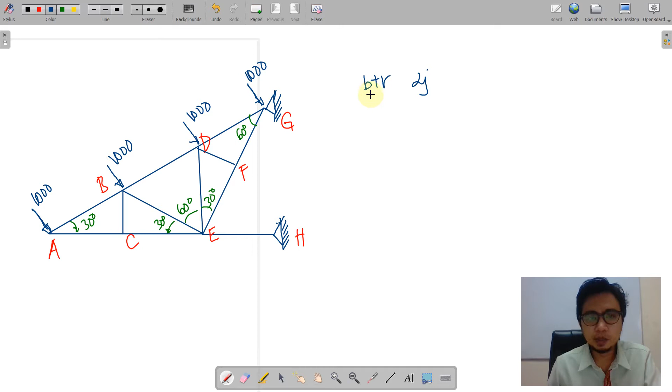Of course, you want to check its stability and determinacy by our truss criterion. We have this criterion, b plus r to be compared with 2j. Our number of bars, if we count it, is 12, and the reaction is obviously 4. As for the joints, we have 8 joints, so this will fall under a statically determinate structure. So let us now place RH horizontal here, and obviously there will be no vertical for H.

That is 0 because we have here a single member, and a single member is countered by a force aligned along its axis. If that is the case, this is a horizontal member, so this should be a horizontal force to counter our force here. For G, we're going to label that as RGY and RGX.

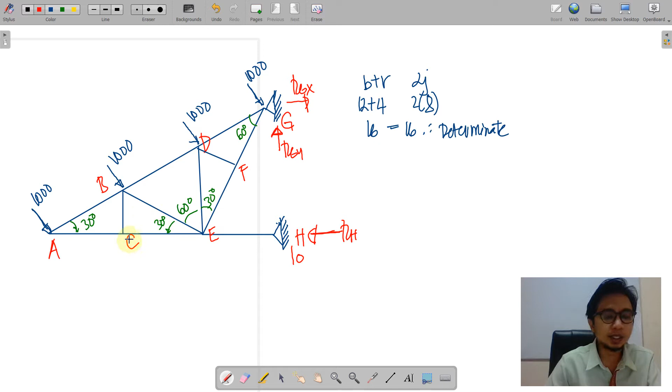Before we start with our analysis, perhaps we can observe our truss, wherein we look at the joints where there are no forces. If we take a look at the truss, we have joints C, E, and F without any loading. If that is the case, we can apply the principle of rotated axis along those joints and conclude some zero members. So, determine some zero members.

If we rotate considering C here, creating an axis on that C, we have the X and Y axis, the usual axis, and we have no load on this portion. Therefore, along the vertical, there will be no vertical resistance on this joint C. So we can say that BC is a zero force member. Similarly on F, creating a rotated axis, say this is X and this is Y, EF and FG are parallel to each other, so they will just counter each other along this rotated x-axis. However, there is no force along the rotated Y here, so we can say that DF is as well a zero force member.

So moving on, of course, we are to work with A, because A has only two force members to work with, that is AC and AB. So applying now our rule, we'll go over joint by joint analysis, because this time the loading is oriented perpendicular to a certain member, so this inclined member, say A to G.

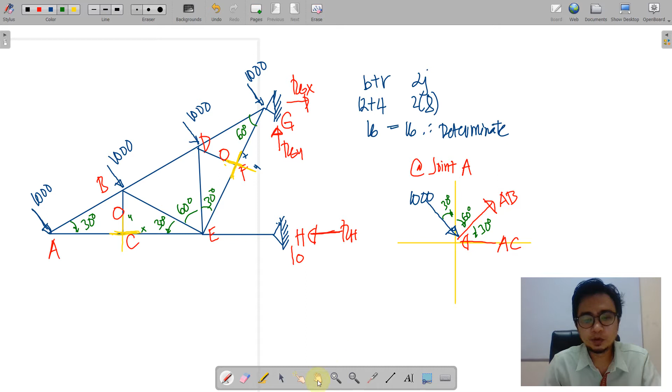It is obvious here that AC has nothing to do with the vertical, so AB is the only force along the vertical line. Therefore, by summation of forces vertical equal to 0, with upward denoted as positive, we have AB sine of 30 less 1000 cosine 30, and these are all equal to 0. So AB is found to be 1732.05.

We can get the other force by summation of forces X equal to 0. We have leftwards AC plus rightwards 1000 sine of 30 plus rightwards AB using the angle 30, that is cosine 30. Those are all equal to 0. Therefore AC, substituting the value of AB, we have 2000.

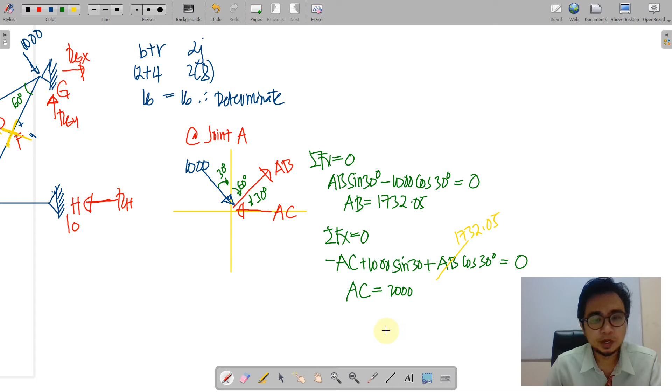Let us note here that all of our answers are positive values, meaning we have correctly assumed the direction for AC and AB. Placing this into our truss diagram, we have 1732.05, that is tensile as assumed here, and a compression of 2000 as assumed also here. So all of our assumptions are correct, so we will place it correctly here. If we have a negative sign, we will just maintain the direction and carry the sign on your truss diagram.

So if we proceed to joint C, of course, there is no force on the vertical side of C. Then we have a compressive force of 2000 on C. Therefore, it will be countered by no other than CE, and that is also equal to 2000 here. Moving on, at joint B, we will draw the x and y axis.

So I'm gonna place here what we have obtained on AB, that is 1732.05, and assume the parallel force, which is BD, and both are inclined at 30-degree angle on the horizontal line. We then again place the 1000 here. 1000 here is again perpendicular to this diagonal member, so that this is 60 degrees and that is also 30 degrees. And then we have here BE inclined at 30-degree angle with the horizontal also. So BC here is equivalent to 0, so we do not have to place it in our free body diagram.

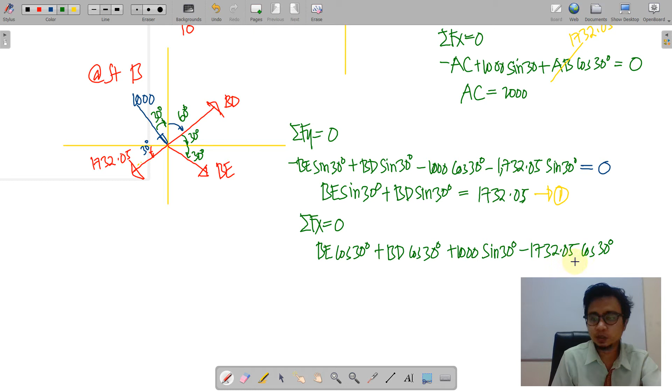The other equation will be supplemented by summation forces x is equal to 0. So we perform this equation according to the arrangement of this equation. We start with BE. BE is rightward, as well as BD, that is also rightwards, plus a rightwards 1000 sine 30, less a leftwards 1732.05 cosine of 30, and all of this will be equal to 0. Again, we organize the equation. We just have to transpose the constant to the right side, and this will be our second equation.

Working with the two equations, we have two equations with two unknowns. We have negative 1154.7 for BE and BD equal to 2309.4. So here we have a wrong assumption because we have an indicated negative sign in our result. So therefore, BE is initially assumed to be tensile. Therefore, with the negative sign here, we'll just have to correct it that this should be equal to positive 1154.7. This is in compression. And then BD yielded a positive answer. So therefore, our assumption that this is tensile is correct. So we'll just have to place here a tensile force.

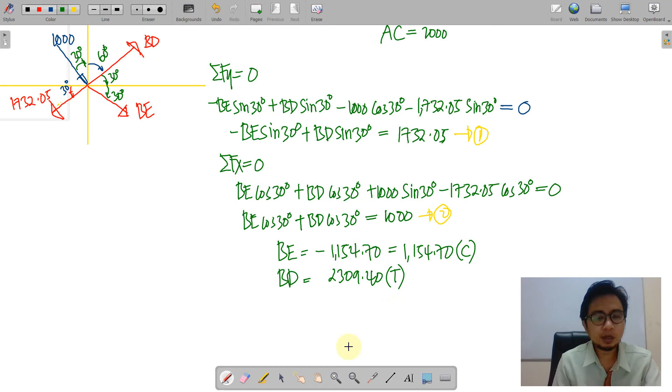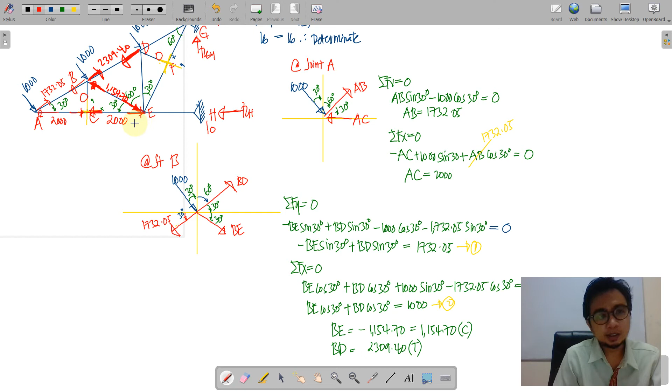But in our truss diagram, we do not have to replace the arrow. Okay, just place what you have assumed, then carry the sign and place your BE as it is. That is in tension. However, it is negative 1154.7. So again, I did not replace or change my assumption for that BE. So it is assumed as a tensile, but I'll just carry the negative sign for that.

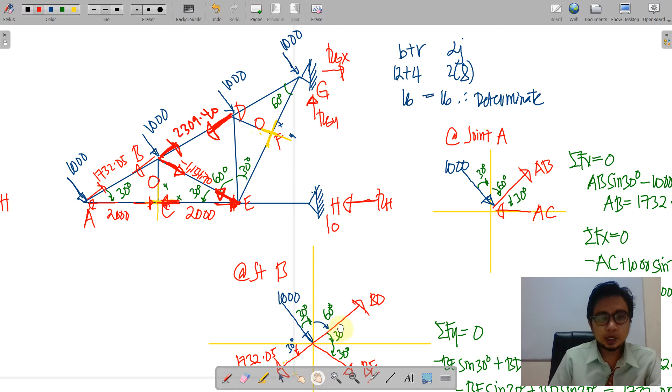So moving on with the solution, of course, between D and E, D will be much preferred because at D, there are only two unknowns, namely DG and DE. So we isolate joint D here. We see at joint D, we have the X and Y axis. Illustrate what's in the joint. So we have here 2309.4 inclined with the horizontal line at 30 degrees. Parallel to it is DG assumed as you see. We again use the horizontal line for its reference angle 30 degrees. We reflect the 1000 force perpendicular to these inclined members. So those are the internal angles using this figure.

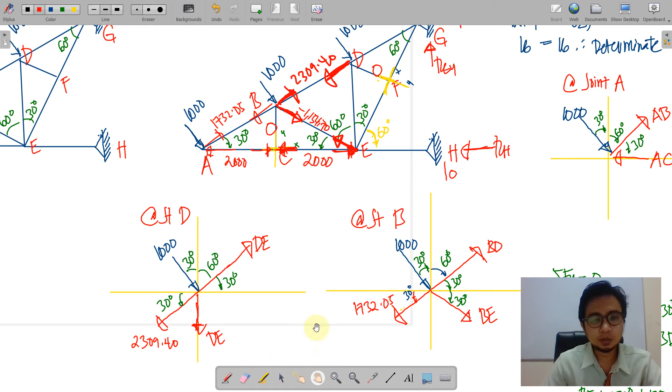Now for member DE. Member DE is just vertical. Why? Because as we can see in the figure, we can conclude that the last angle here is actually 60 degree. Therefore, this is the force assumed at a tensile orientation. So, working with this joint D now, we form summation forces X is equal to 0. DG cosine 30 degrees. We think we have a similar force here, so perhaps you can check that one. So joint D, this is DE. This is DE. This should be DG. Okay, so that this is also DG. Less a leftward force 2309 cosine 30 plus the rightward 1000 sine of 30 degrees. And these are all equal to 0.

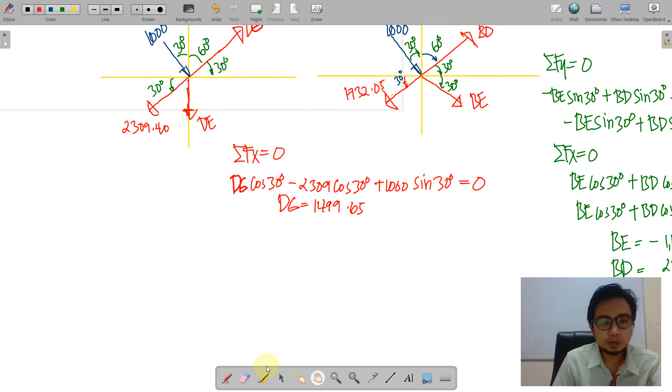So here we have a single unknown, DG to be equal to 1499.65. For the other unknown, we perform summation forces Y so that we have downwards DE, downwards 1000 cosine 30, downwards 2309.4 sine of 30, and an upwards DG sine of 30, that is equal to 0. We substitute the value of DG. So I think we have to check for DG here. We should have 1732.05. Substitute it in here. We have negative 1154.7, which implied a wrong assumption on the direction.

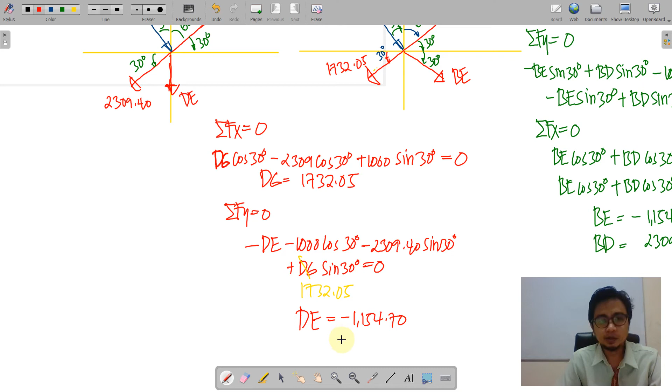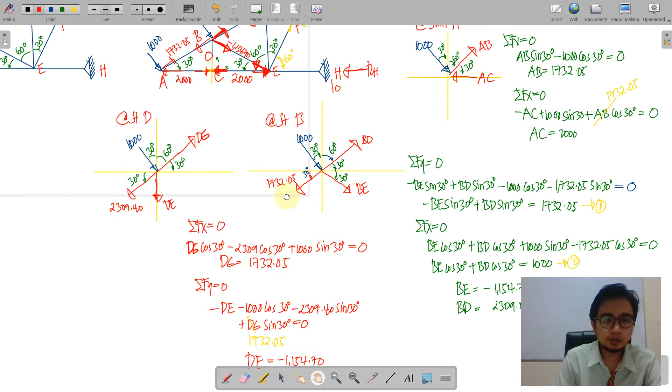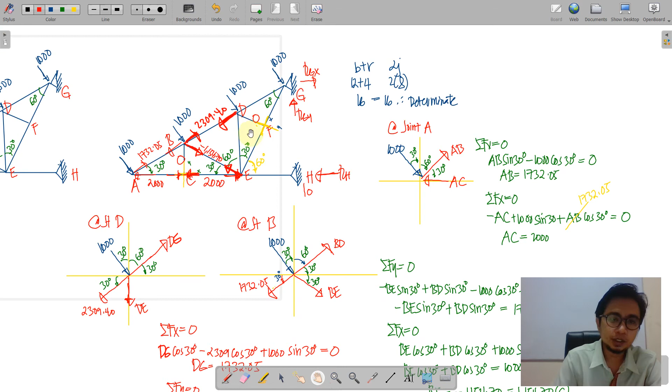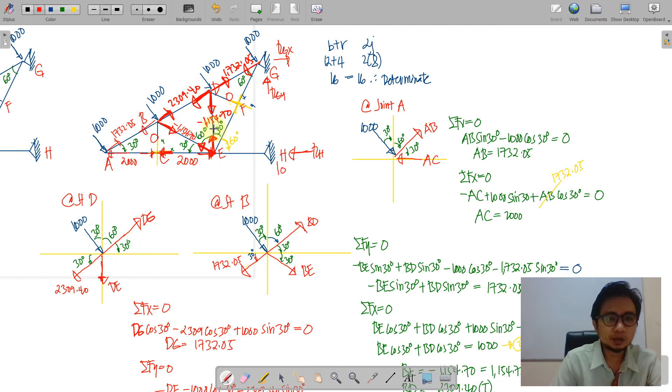So looking on what we have finished, we can place here now the value for DG, and DG was assumed to be tensile. So here is DG, that should be tensile with a value of 1732.05. And as for DE, DE yielded a negative answer, and it is assumed to be tensile also. Therefore, we'll just maintain that tensile, but maintain also the negative sign. So finally, as we can see here, we will now proceed to joint E.

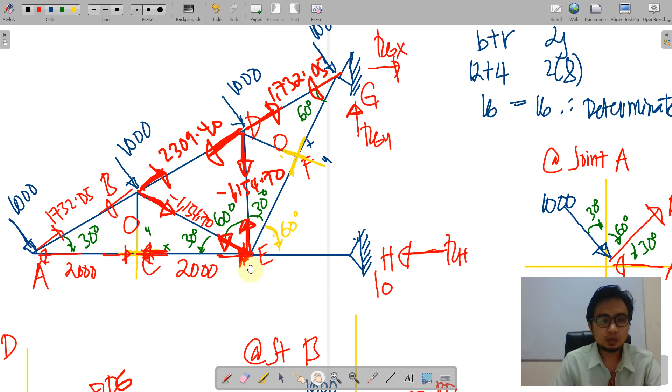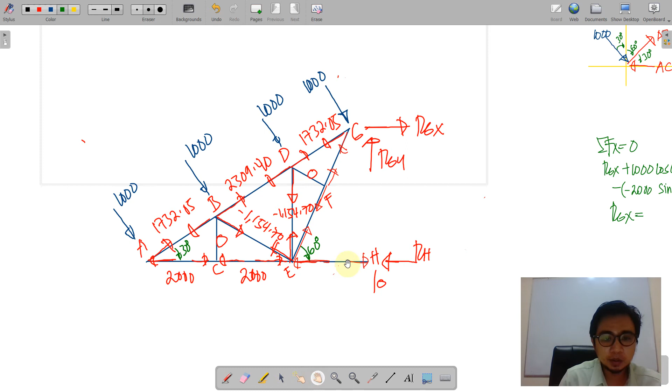So looking at what we have finished here, we have already indicated the forces on the truss diagram, and then what is left is the member EH and joint G. If we consider joint G, there will be three unknowns, namely DG, RGY, and RGX, aside from FG, which could be determined out of joint E. So it is more feasible that we work with joint E here. Since joint E contains EH and EF unknowns, we isolate joint E.

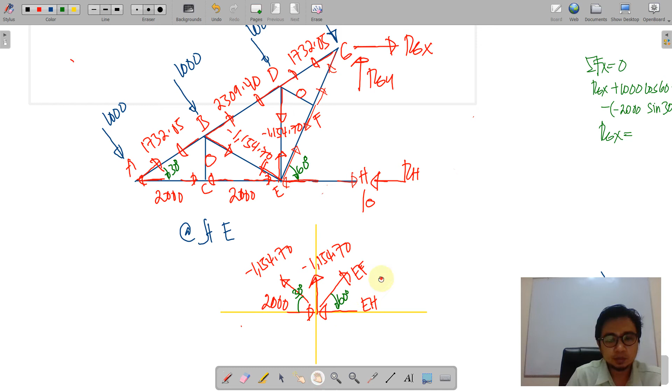We have an upward force DE. Don't forget to carry the sign, and then indicate this negative 1154.7 inclined at 30 degrees and a rightward 2000 here. We assume a direction for EH, and this is EF inclined at 60 degrees with the horizontal. We perform summation of forces x and y equal to 0. We have this rightward 2000, this leftward 1154, but carry the sign. EF towards the right is positive, EH towards the left, equal to 0. We leave this for a while, tagging it as equation 1.

And then we perform summation of forces y equal to 0. The upward force here, 1154, but carry the sign again, and another upward force, carry the sign again. The EF going upwards, sine of 60. These are all equal to 0. We have EF equal to positive 2000. We go back to equation 1, substitute here, and then solve for EH. We have EH equal to positive 4000, which is also equal to the reaction at H, 4000.

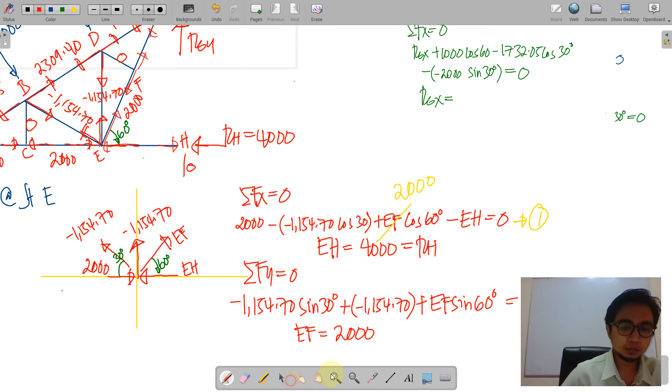So we place our answer on the truss diagram. We have EF, and EF is assumed in our joint to be tensile, so it is tensile in the truss diagram. We'll just adapt that one and place EF equivalent to 2000, and therefore by looking at F, we can also say that this is 2000 as well. So finally,

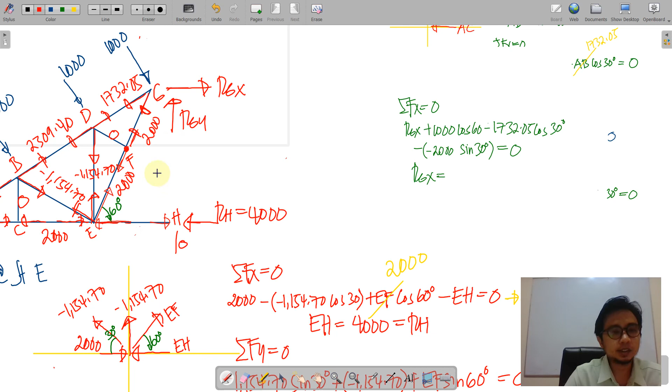proceeding to joint G, we have the x and y axis. Place the two reactions. We place the external 1000 here perpendicular to this member, and this is inclined at 30 degrees with a vertical line. We place 1732.05 for DG, and this is inclined at 30 degrees with the horizontal line again. Then we place the tensile 2000 here, inclined at 30 degrees with the vertical. Why is it 30 degrees with the vertical? Because this is actually the slope of that one, and the slope is 60 degrees with the horizontal line. So if this is the horizontal line, we measure 60 degrees, and the complementary angle of the 60 would be 30 degrees, referring to the vertical line.

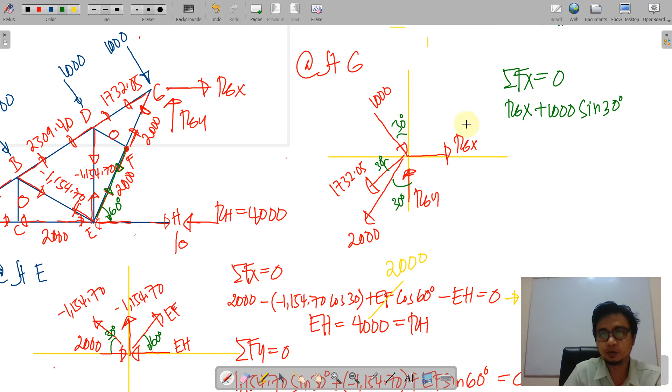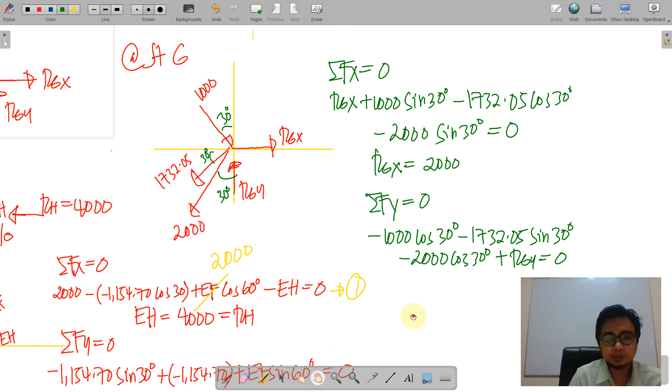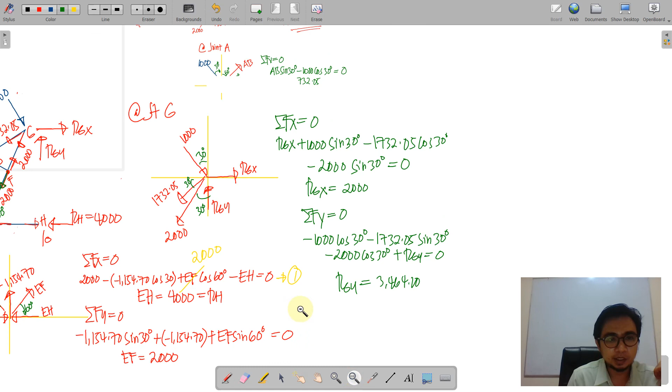Then by this function, we write the equation. We add the rightward force 1000 sine 30, and then we deduct the leftward force 1732.05 cosine of 30. We deduct this leftward force 2000 sine of 30, and these are all equal to 0. So we have RGX equal to positive 2000. Moving on, we take summation of forces vertical. We have here the downward 1000 cosine 30, the downward 1732.05, and then the downward 2000 times cosine 30 plus RGY equal to 0. Solving now for RGY, RGY is 3464.1.

Again, we place these results into our truss diagram. RGX is 2000 and RGY is 3464.1. So out of the internal forces from the truss, we arrive at the three reactions here: RGX, RGY, and RH. So what will be our check mechanism here? Of course, we're going to use this as our check mechanism.

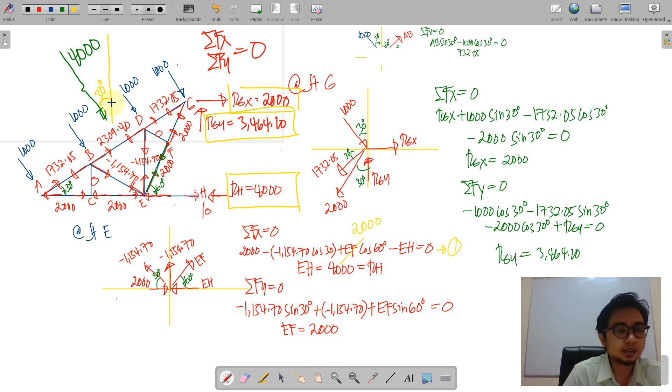How? Let us put in place the resultant of these 4, and the resultant of that 4 is equal to 4000, or 4 times 1000. We get the components by using this angle, 30 degrees. So this horizontal is equal to 2000, and this vertical component is 3464.1. Now, comparing this to what we have got in the reactions, on the vertical we have a downward 3464.1, and among the reactions there is only an upward 3464.1 that will counter this one. Therefore we are balanced in terms of summation of forces vertical. For summation of forces horizontal, we use the horizontal component of 4000, that is 2000. So a rightward 2000 here, and another rightward 2000 will yield a total of 4000 along the right side. This shall be countered by the horizontal leftward force that we computed on the reaction at H. So that will be our check mechanism.

But if ever this does not yield 0 along the X and Y axes, then there are some mistakes in your solutions. So perhaps you can go back one by one to your solution. Okay, so that's it for this problem.